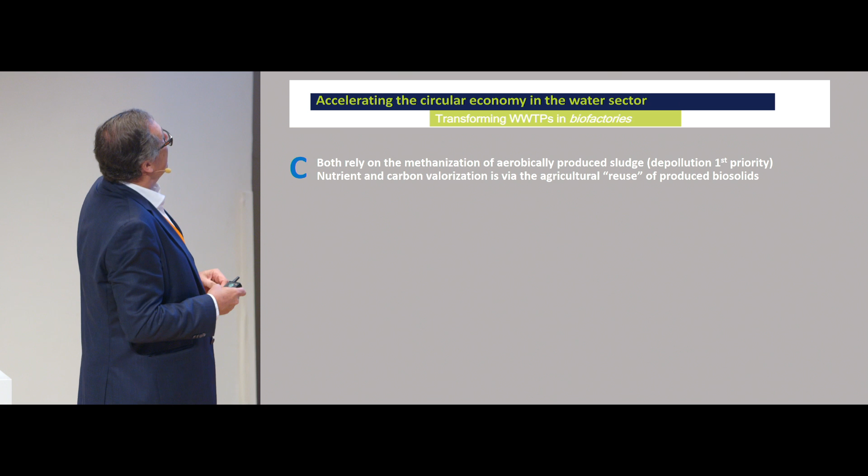But these two examples, as interesting and outstanding and state-of-the-art as they really are, we should be honest, and you probably all recognize the little scheme up there in the corner, they belong more to the reuse economy than really to the circular economy. The circular economy is something a little bit more. Regarding carbon, both of these plants rely on the fact that the biosolids generated will be put into the land as a fertilizer. And they also rely on producing this sludge first by an aerobic process, and so at the very end they are burning all the carbon to CO2.

So what if we would put some anaerobic treatment in front of the treatment train and first harvest all the potential energy which there is in wastewater, and then we would depollute the rest of the water stream? The scheme would change completely. We would have a completely different system. What if the priority would be to produce some valuable monomers or polymers, instead of producing two molecules, CO2 and methane, which are the most oxidized and most reduced forms of carbon? Doesn't really make too much sense. It did make sense 50 years ago when the priority was, and only was, depollution.

Regarding nitrogen, obviously both of these plants have some form of sophisticated nitrogen removal systems. But there is no system to recover this nitrogen in a more valuable form. What if we could produce valuable nitrogen-containing chemicals instead of blowing nitrogen gas into the atmosphere, which is what we do when we nitrify and denitrify? And regarding phosphorus, which is the other third important element, both of these have some sort of phosphorus reduction, but they have no struvite process or any alternative process for phosphate recovery.

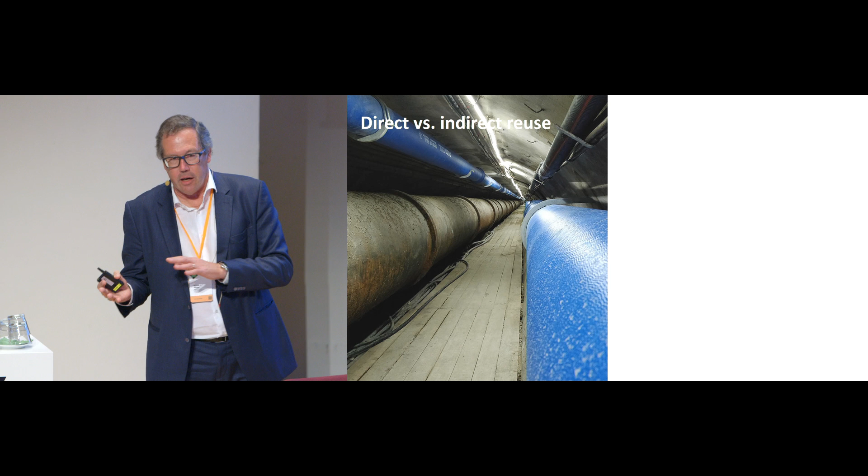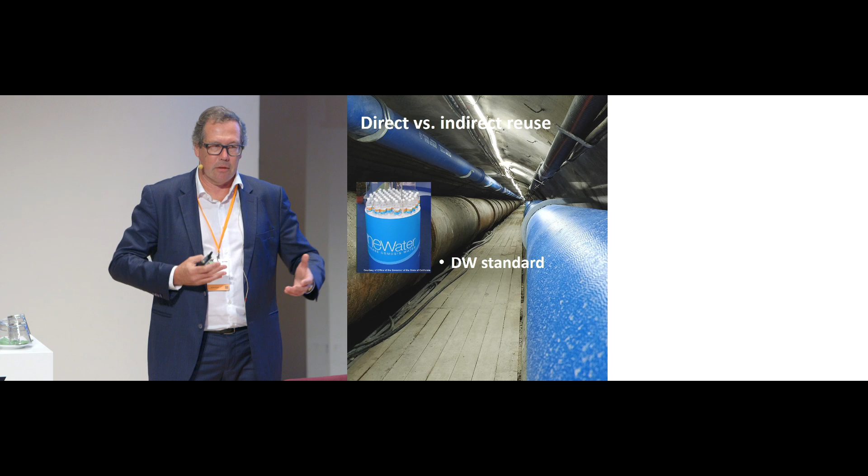I think we need to take some of these global aspects that we have been discussing before, and we need to apply them to the local management practices. For example, we need to make a choice between direct or indirect water reuse, or both. What does each imply? Direct reuse implies that we treat all wastewater to drinking water standards. And that, as you can imagine, is kind of expensive to do. There's only one water quality then. That can then, that's the advantage, go through any piping mains.

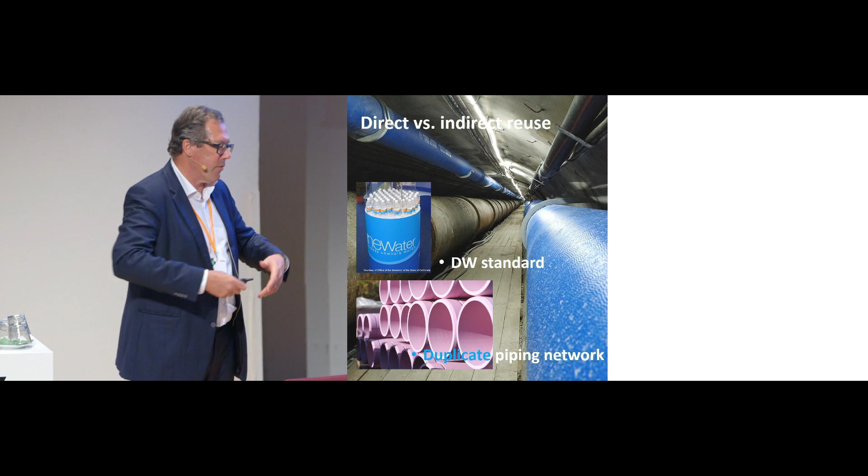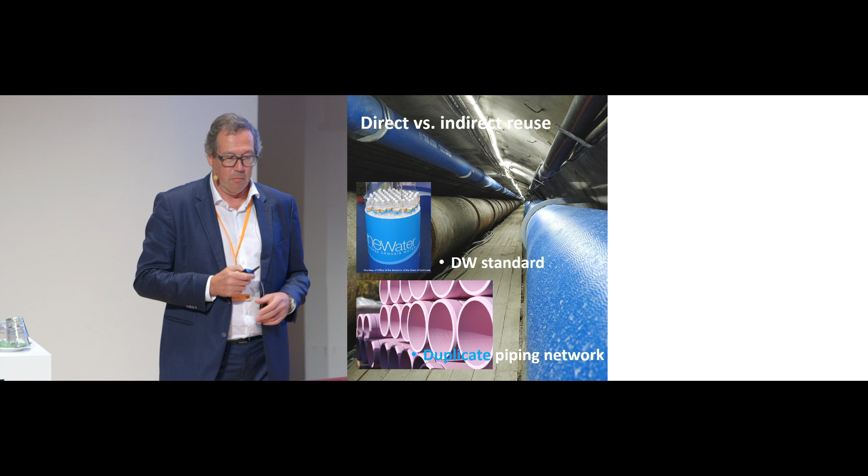The alternative is to treat wastewater to a less important level and have indirect reuse for agriculture, for cleaning, for irrigation, what have you, even for recharge. But then, because of security reasons, you cannot use the same water mains, and that means you have to develop a second piping system, like they do in California, which has to have a different color. That's why it is pink colored. Okay? And that is in itself a huge investment to do. So probably the answer is we need to consider both depending on where we are and what we're looking at.

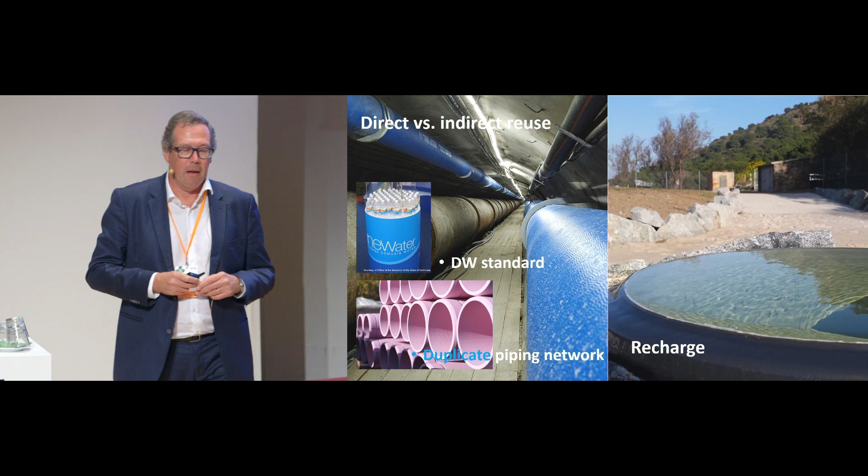The second element we had was recharge into the aquifer, recharge into the ground. Because we do recharge into rivers and lakes and even into the ocean. We do that. But into the ground very little is done, it's very little used. There's clearly a quality issue because down there we really don't control so many things. So if we put something really naughty down there that we don't want to be in the water, getting it out of there later on can be impossible to very, very difficult. Okay? So there's a quality issue of what type of quality we can pump down there.

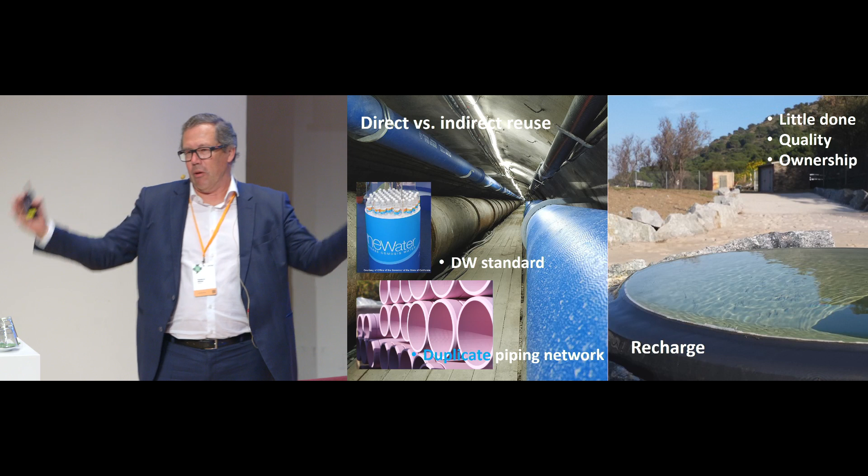There is a question also of ownership, because aquifers extend beyond political and regional borders, countries, etc., and are sometimes even not well understood. There is also a question of ownership between who pays for treating and pumping the water down, and who takes it out again. If it's all 100% public, you could say, well, it's no big issue. There is still the issue of long term, of taking a political decision today for water that might be taken out 20 years later. Some politicians would say, well, I have other priorities.

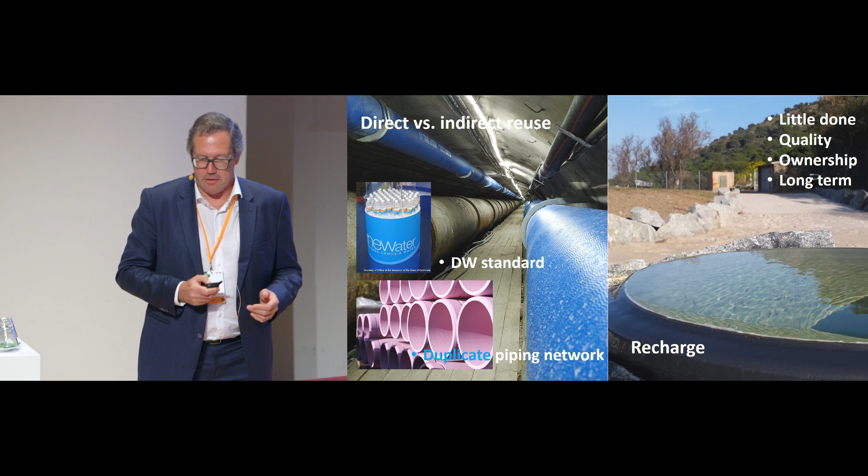Then there is the surface storage that we can contemplate. Surface storage is in the form of dams, obviously much more extensively used. Here the question is, what is the real priority when we build a dam? Is it our water policy? Is it harvesting electricity through hydropower? Are we really making sure that those priorities are right and straight? How many dams need to be built? How many basins do we construct? And how big do they have to be? The Three Gorges for everybody? I come from Spain which, at the time of the Franco regime, which was not very democratic, made a lot of water dams, and today we're very happy to have those. So this is obviously quite controversial.

Another thing which is very controversial is the water transfer and the potential water markets. Here, obviously, the issue of water pricing becomes the central element, and that is a controversial and highly political issue. And I'm not talking about public or private water management. It's the cost that we pay for water.

And it's certainly a new paradigm, because if we still have today in Europe, not everywhere, but we have a problem with the full recovery of water treatment costs, the new paradigm is actually saying we should pay water for its cost of opportunity. Where I come from in Spain, in Murcia, the farmers say the most expensive water is the water you don't have.

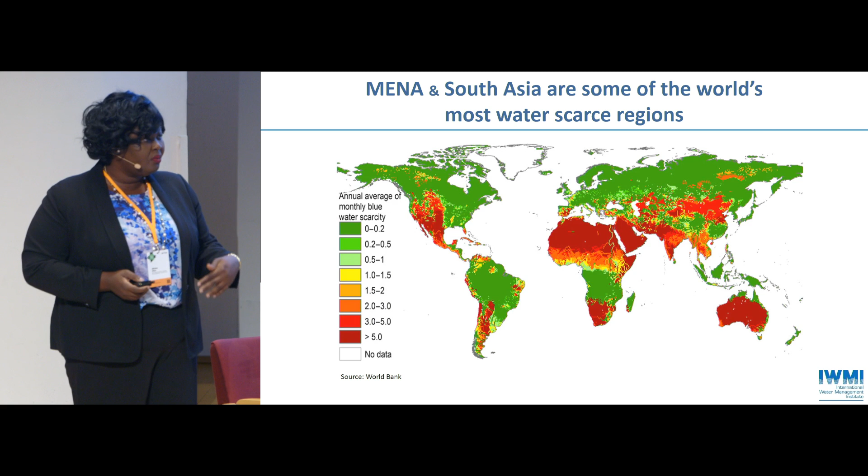So this graphic is from the World Bank, which highlights some of the hotspots for water scarcity. And as you note from the graphic, the MENA region, as well as Southern Africa and South Asia, are some of the regions that are currently facing significant water scarcity, but also a decade from now, 2 decades from now, the situation is expected to worsen.

If we take the example of South Africa, we all heard in the news how they experienced a day zero, where Cape Town, the city was running out of water. And this was a significant wake-up call for those people living in Cape Town. But in many cities in Africa and in Asia, they face their own day zero quite frequently.

Every dry season, the cities run out of water, but also when their energy supply is rationed, and so the pumping stations do not work, and there is no water that flows through the taps. And so with these examples and that of Cape Town, it has really made us rethink water security and how we can no longer take it for granted.

And we all know how circularity is key, or really the tenet of integrated urban water management. And as a previous speaker alluded to, there are many innovative models. If we look on the left, intersectoral water trade, where we're looking at the potential for reallocating freshwater, for example, used in agriculture, to higher value use in urban areas, but also treating wastewater for use for agricultural production. We can also consider simple models where the cities as their own downstream users, again, looking at how we can recharge our aquifers with treated wastewater.

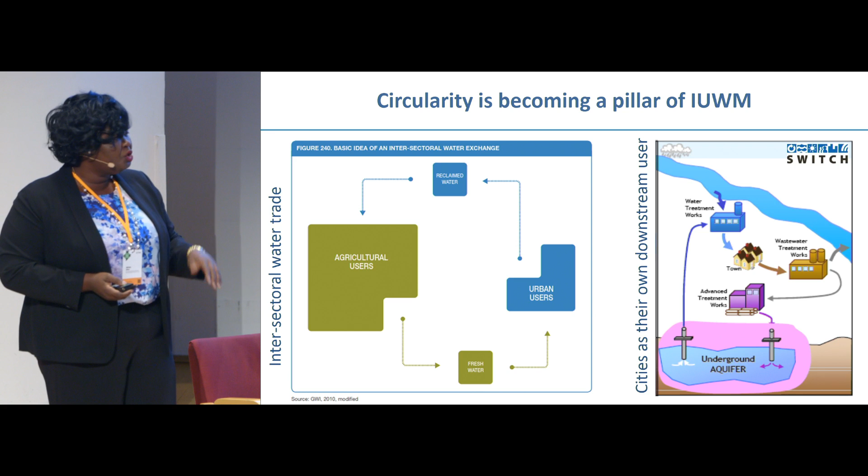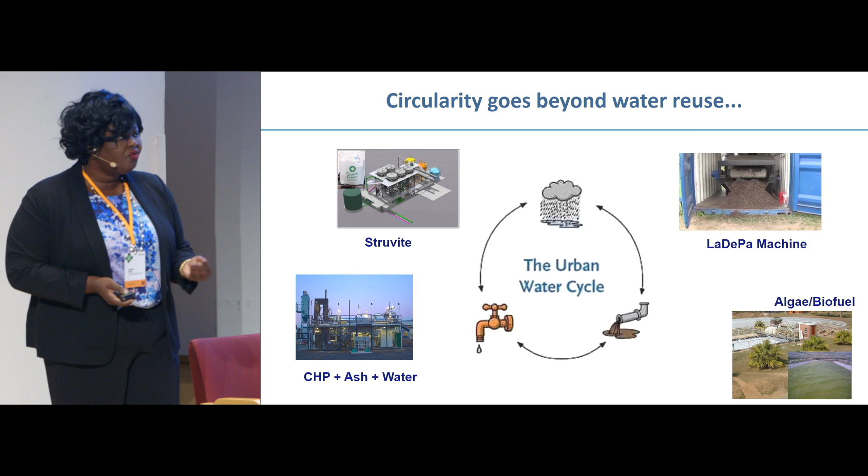Beyond this, we know that we're not only treating wastewater, but there is, of course, significant potential to recover nutrients and energy. The technologies exist. From developed country contexts, these have reached scale, as was highlighted by the previous speaker. However, a lot of these technologies are not applicable in developing countries, and when they are, unfortunately, they remain at the pilot level, and we're not able to effect the change that we're all looking for.

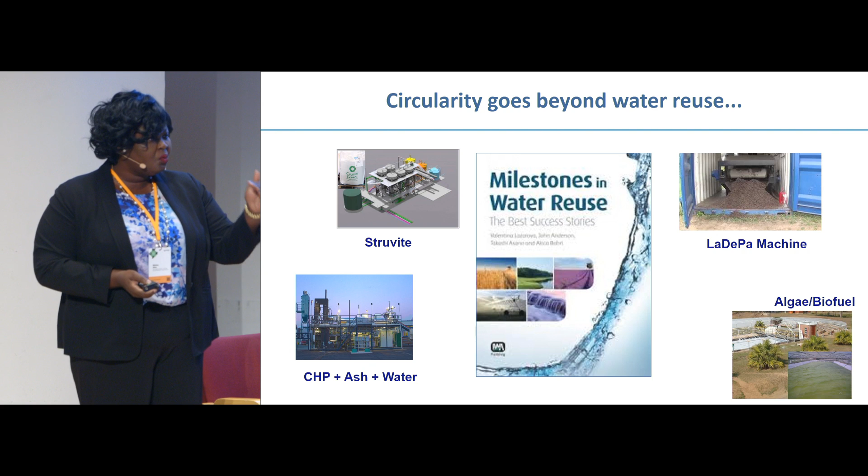And so in the case of Ghana, we really wanted to understand if we are going to integrate these circular economy concepts and principles into the way that we're managing water in our urban areas. It was important for us to move further up the value chain and actually look at the infrastructure that we currently have and really see the level of operation and whether it was actually covering and serving the population.

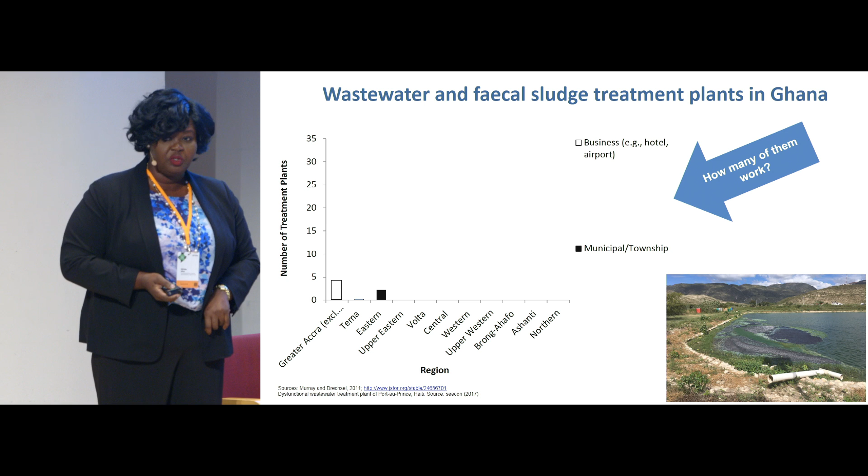So across all the region, based on the population, we noted that we did have sufficient number of treatment plants to manage the waste that was being generated. However, looking closely and trying to assess how many of them actually functioned before we took the steps towards circular economy, for the entire country, we have less than 10 wastewater treatment plants. And so this is what we have. The majority of the treatment plants are not functioning to capacity, or oftentimes they don't at all. And the majority of the waste that we're generating still goes into the environment untreated.

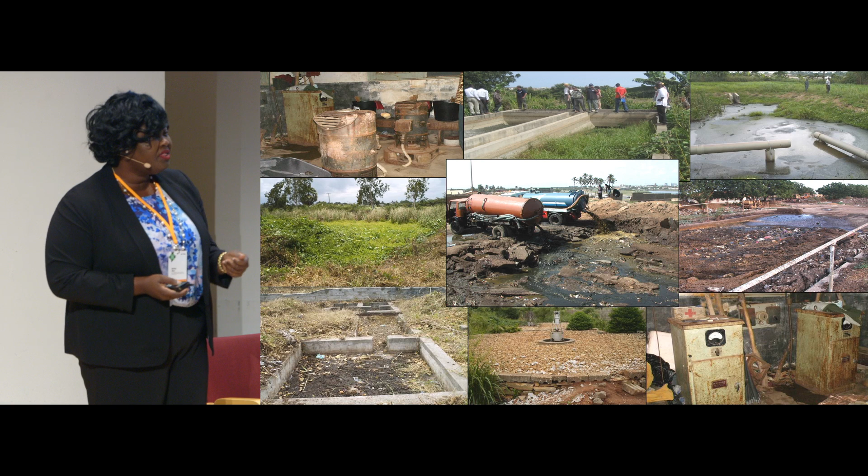And this is critical because it's great that we're talking about integrating circular economy guidelines into the way that we are drafting our next frameworks. But it's important that we understand that we are not going to function in silos. And so understanding the benefits it generates to the sanitation sector, but also the interlinkages and the implications that it will have when we're thinking about investing in some of these interventions.

And so what we have is that we're still struggling to treat our wastewater because we don't have infrastructure or the capacity to ensure that these investments are sustainable. And we're still creating significant water pollution. When we talk about wastewater, we often only think about wastewater that flows through sewer systems. But in many developing countries, the majority of the population depends on on-site sanitation systems, septic tanks. If we take the case of India, 100 million septic tanks do not have receiving treatment plants. And so again, we go back to the challenge of

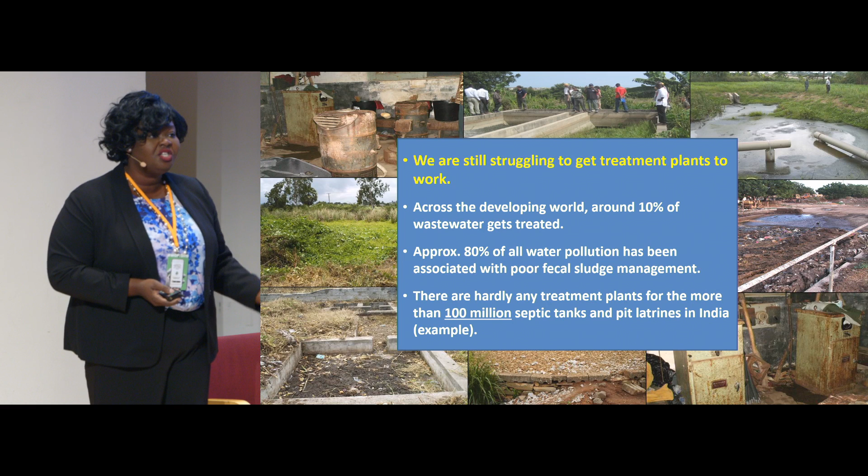environmental degradation. We do have circular economy-based interventions, and donors have invested, and we're seeing business growth in some parts of Africa as well as Asia. However, these continue to be characterized by subsidies. We don't see them being scaled up to have the impact that we're all working towards. We know that financing is a key challenge, but what remains in developing countries is business growth, really understanding business planning and our management strategies.

Otherwise, we're going to remain at a pilot level and we won't be able to scale these up to effect change. And this is where we've talked about business, but really tangible business models that work. And of course, these are not functioning in a vacuum, but really housed in the right enabling environment. And so my next couple of slides are going to highlight some models that have been shown to actually be successful and have promise to be scaled up in developing countries to actually have impact.

And we already know this is a very common example where we're treating wastewater and it's being used in the agricultural sector. You can have a different constellation, whether it's a public-private partnership, or a public entity or private entity that manages the treatment of the water. And this is sold to farmers, and there are benefits to households and so forth.

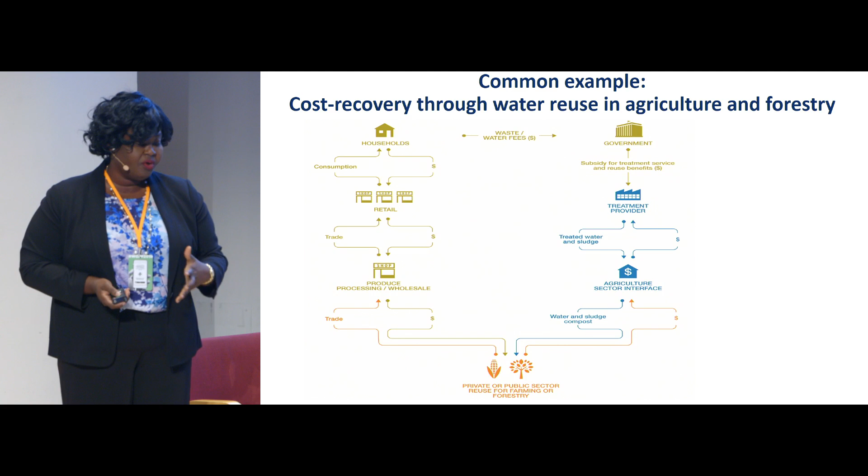The main element of this model is we're not only generating benefits to the agricultural sector, but we really want to reduce the cost for operation and maintenance, the burden that is borne by municipalities. Because in many developing countries, they simply do not have the budgetary allocation to cover the cost. And so with a model like this, we've known it to be very successful in the MENA region, where we're generating revenues to cover the operation and maintenance costs, but we're seeing significant benefits to farmers as well. And this has to happen with very clear institutional responsibilities and regulatory support.

But as we have noted, if there are alternative water sources, then the issue comes to what is the market demand. And again, going back to pricing, if fresh water is priced lower than treated wastewater, then we know that there is no willingness to pay and there won't be a market. And so this example really shows the potential that circular economy has for the sanitation sector, but also the benefits that it generates beyond that.

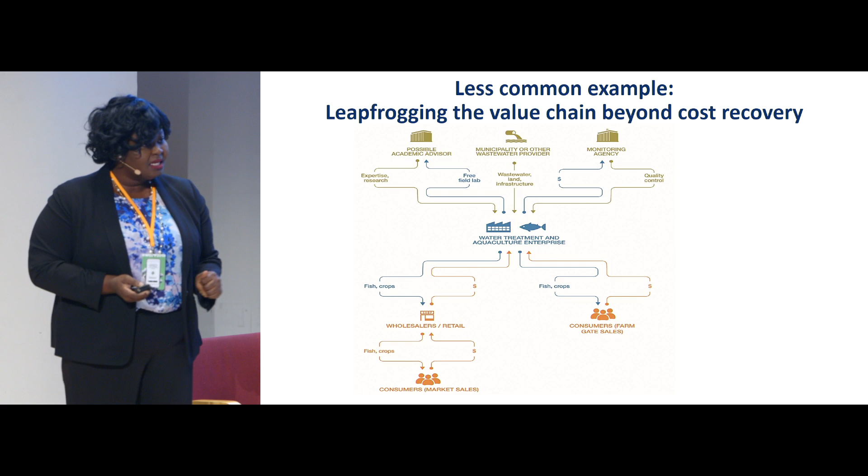Looking beyond just agriculture or irrigation, but looking at how we can leapfrog the value chain in treating wastewater for aquaculture production. And here we've seen cases in Africa and Asia where they're not only recovering their costs, they're breaking even, and some of them are actually generating revenue. And so from that perspective, similarly, ensuring that there are very clear benefit-sharing mechanisms between the entity that manages and operates the plants and the people that own the assets.

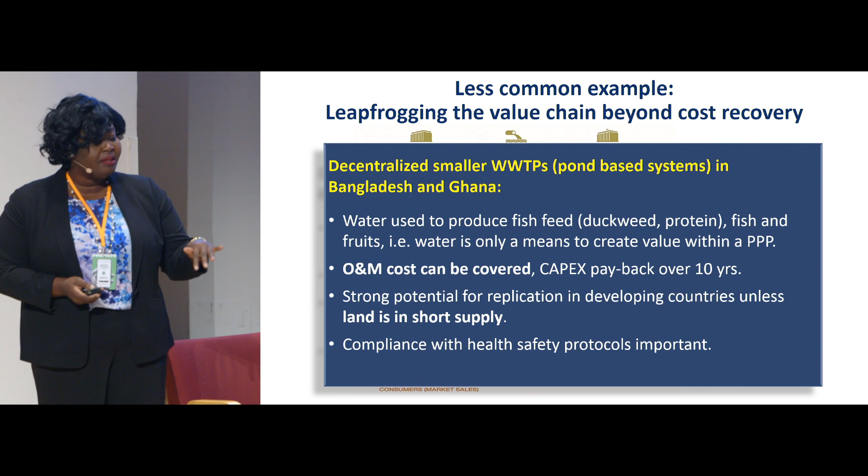With treating wastewater for aquaculture, for example, there is potential for full cost recovery, but there are resource constraints that we have to keep in mind. And this relates to, again, when we are transplanting technical solutions or business models into the developing country context. Related to land, for example, where we really have to think about what technologies work. And with aquaculture, we have to not only look at occupational health risks, but also the consumer perspective, and ensure that we're implementing health safety protocols.

This is a model that is emerging, intersectoral water trade, again, where we're looking at how we can reallocate water for different uses and ensuring that we're matching the uses to the water quality. And this has been successful where there is a year-round deficit of water and where farmers are able to swap out fresh water for a larger quantity of treated wastewater.

The challenge with these business models, while they are very promising and can be successful, is the contracting mechanisms. Oftentimes, water rights are not clear, and so the contracting agreement oftentimes results in one party reneging on the terms of the contract. But there's great potential, as we've seen in areas where there is significant water scarcity.

So there are some examples, commercial entities in Ghana, in Eastern Africa, and also new cases in South Asia where we're converting fecal sludge to an organic fertilizer. And one of the first commercial plants in West Africa was established through a collaboration with IWMI and the municipalities. Here, essentially, we're not only looking at how we can treat waste and harness the nutrients from the waste and provide benefits to the agricultural sector.

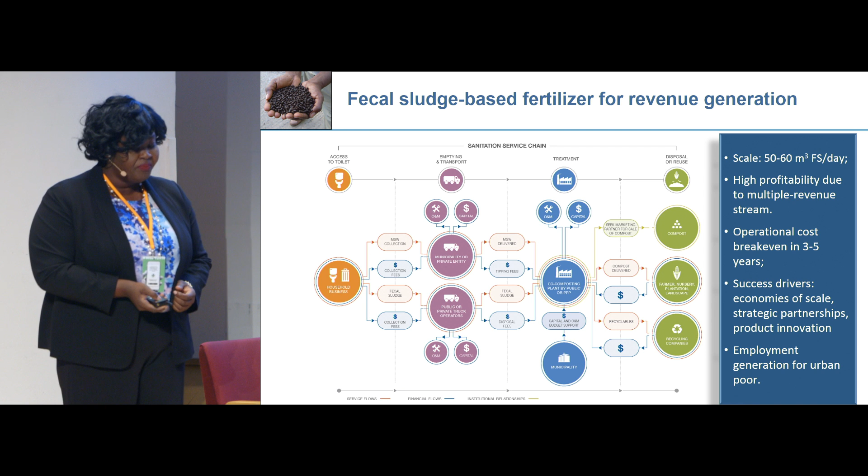These models vary in scale. Some of them can be small or large scale, and of course, generating significant benefits to the informal sector, again, if we find ways to integrate them into the sector.

So in concluding, circular economy principles are great and we have great conversations, but it's really about how do we make these amazing technologies that have been developed actually work in the developing country context. And while there has been some traction, we still need to work on our enabling environment, looking at the benefits that it produces, but also viewing it from a business lens, and looking at what really works and thinking beyond just cost recovery. And again, when we talk about water, think beyond irrigation, but also looking at different value propositions that can generate more economic benefits.

And giving significant consideration to business models around water trading and understanding what the water right mechanisms and what enabling environment is required. So the cases that I spoke about are in a recent publication, and it is open access and available online. I'm happy to answer any questions thereafter.

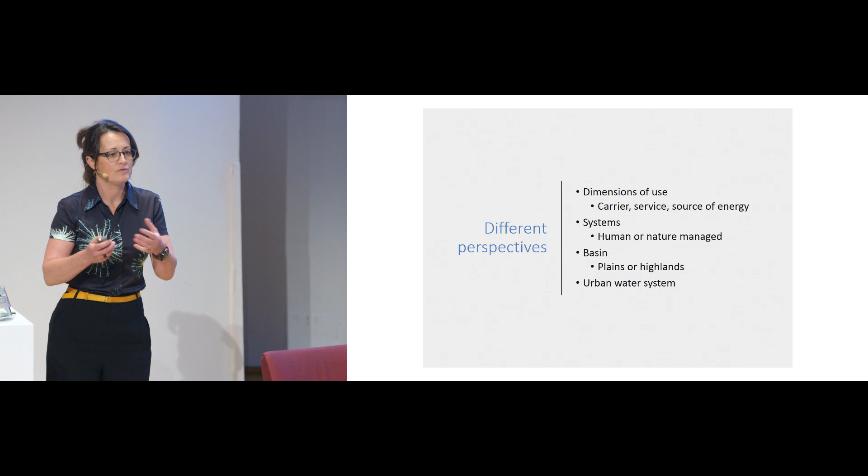And we have different perspectives, and I won't really dwell on this, but water has already been discussed. It's a carrier of nutrients, of chemicals, of minerals. We commonly think of it as a service. It's something we consume. It's used in production processes. But where you are depends, and the strategies you have depend on whether your city is in an arid plain or if you're at the top of a wet highland. Are you talking about a human-managed system, a nature-managed system? So we have this current linear model.

So an example, first of all, anaerobic digestion: we use it to process sewage sludge, and we also use it to process food waste. Because of different directives and the policy environment we're in in the UK, it's very difficult to co-digest food waste in an anaerobic digester that works on sewage sludge, partly because of the different setups. A municipality might run the AD for the food waste and a private company might run the AD for the sewage sludge, but also because of the different directives of spreading and how we've transposed those directives. So two different sets of legislation, so people don't do it.

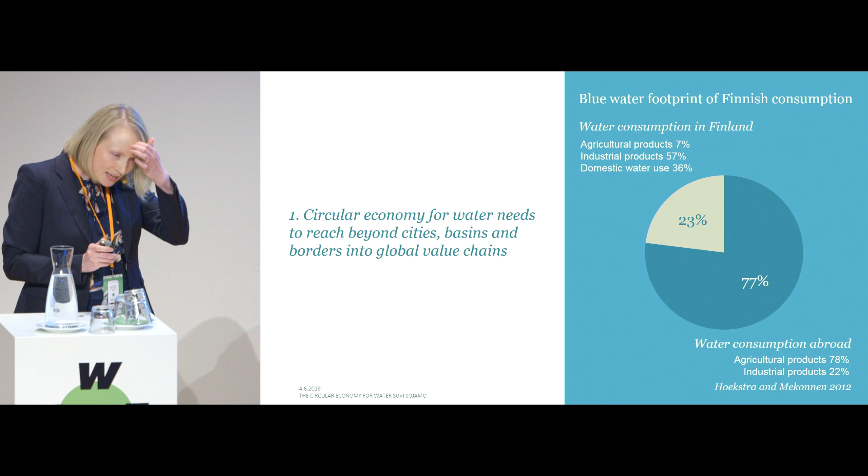All right, first lesson. It basically underlines that internal measures are rarely enough for tackling water challenges, regardless whether we are discussing cities, countries, basins, or companies. Regardless whether we are discussing corporate water stewardship or circular economy, we really need to look into global value chains that were also discussed earlier today, as they are really important structures for water use management and governance. So it's not only the traditional water use infrastructure we need to be paying attention to, it's also the broader structures where water is used, managed and governed.

And Finland provides an illustrative example in this regard. If we look at the blue water footprint of our consumption, that is the total amount of surface and groundwater consumed by us annually, actually 77% of that footprint lies abroad, despite our water abundance. And that footprint is also left in areas that are water scarce and suffering from other water-related problems. That said, we need to understand the whole life cycles and global interdependencies of our consumption and production, also when it comes to water.

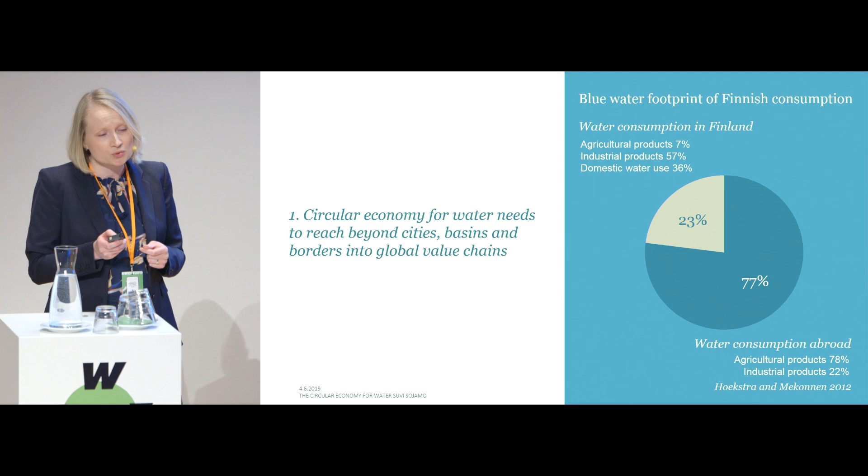The second lesson relates to the drivers for business engagement in water. There's a lot of talk about the need to engage businesses more in solving water challenges, contributing towards SDGs. At the moment, it's not happening at the pace needed, as this rather blunt quote from CDP Water, which collects water disclosure data for investors, puts it: currently, corporate action is insufficient to achieve SDG 6 and deliver a water secure future.

At the same time, companies of different sorts and sizes are the major water users internationally, and that results in responsibility. That's a very strong reason for a business case for increased engagement and understanding of water. In addition, water risks and opportunities are other important drivers. They are usually classified as physical risks and opportunities related to water availability, water quantity, water quality. They might be related to reputation, as the way water is approached and dealt with affects company reputation and markets.

They might be regulatory, as too weak, non-functioning regulation hampers the operating environment for companies and stakeholders alike, whereas fit-for-purpose regulation, which has also been the flavor of today, really levels the playing field and ensures sustainable practices by all. Ultimately, all these risks and opportunities materialize as financial risks and opportunities, which are related to both investments and profit.

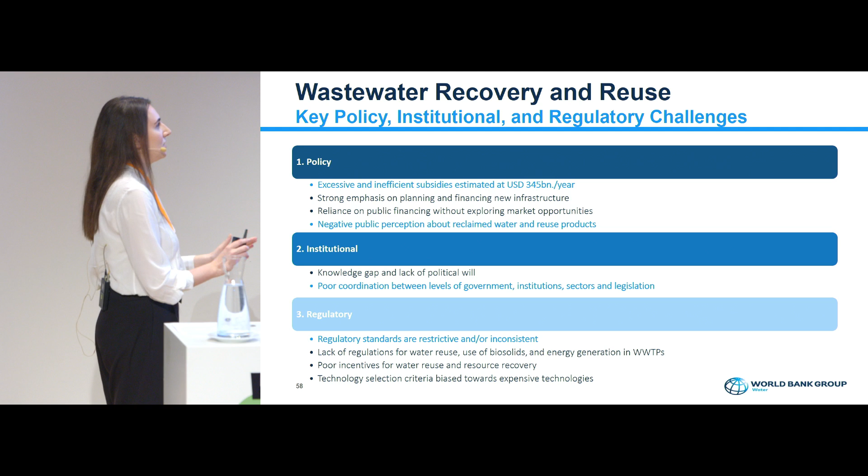And they can also be inconsistent. So, like we've said before, with wastewater reuse, you need to be able to work across energy, health and environment and so on. And without having a complete regulatory framework, not much can be done.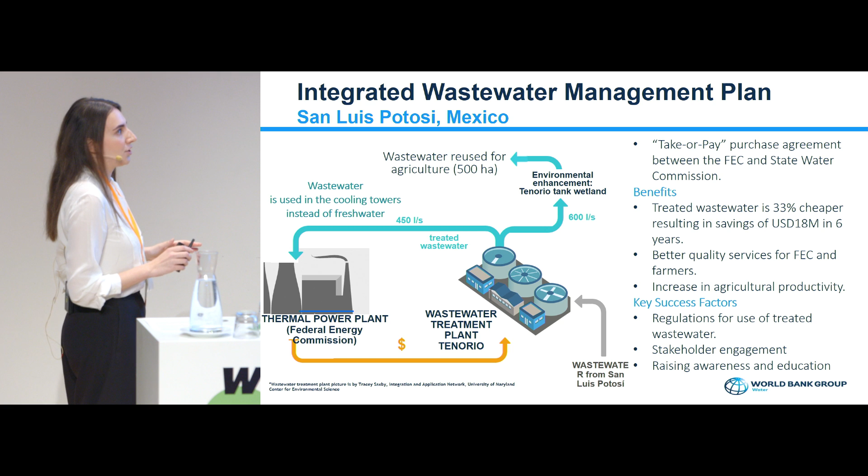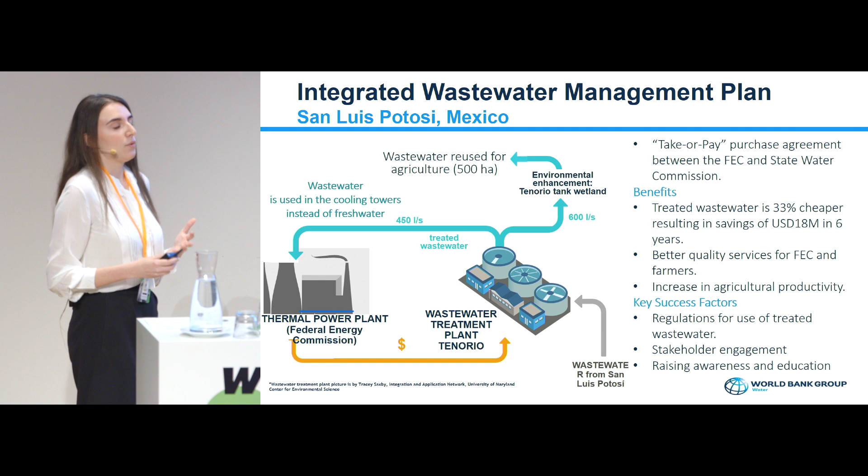You'll see at the bottom there some of the key success factors that really stood out with this arrangement: regulations were implemented and introduced for wastewater reuse. Stakeholder engagement was key. They made sure that the agricultural sector was involved, the energy sector was involved through negotiating the contract, and raising awareness and education to make sure that they address that demand side.

This is a case in Durban in South Africa. It was a 20-year concession contract. And this contract was interesting because the technologies that were implemented were actually tailored to the two key industries, but at the same time it was made sure that they can be reused after the 20-year contract is done. Again, they're paying up to 50% less for their water resources. They also have risk mitigation measures within their contract. The recycling plant is getting its regular source of revenue.

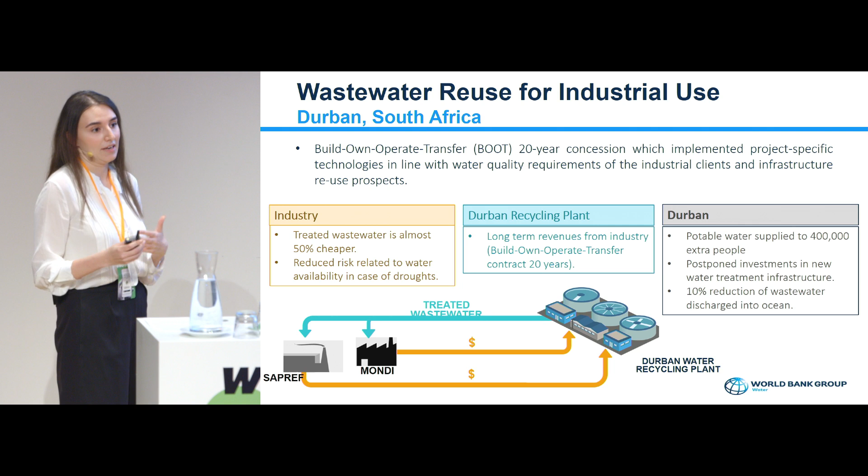And also, in terms of the community themselves, fresh water resources were freed up for 400,000 people. There's 10% less wastewater discharged into the ocean. And also investments in new infrastructure weren't really necessary during that specific time period anymore, and they were postponed.

And lastly, Egypt. That's where I'm originally from. And this was the first PPP project to be implemented in Egypt. And so in order to make sure that the governance mechanisms work well, they established a PPP unit within the Ministry of Finance.

They made sure that it had people of the highest caliber. They made sure they had external advisors to make sure that they were gaining lessons learned from best practices. There was a lot of stakeholder engagement and institutional coordination, and that was through the governance committees and oversight that provided oversight and guidance just to make sure that everything was being done on time, to make sure inputs that were needed were received, and so on. And also risks. Obviously, again, risk analysis and allocation was clear, and understanding of roles and responsibility were made clear.

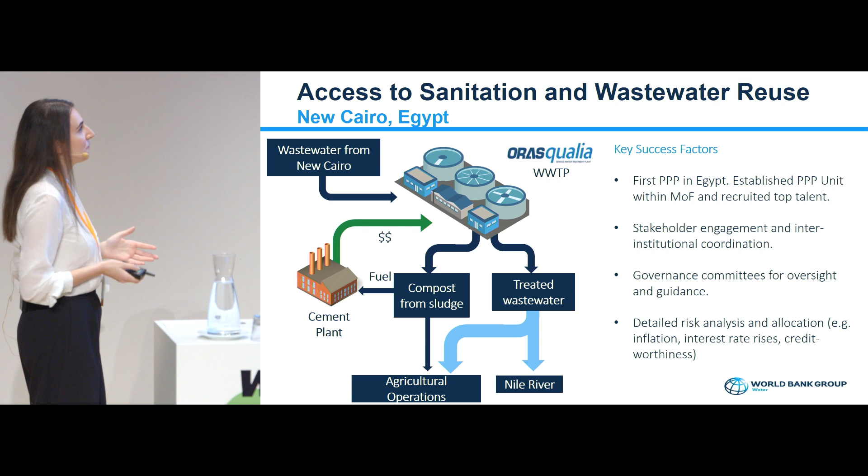One is costs. Yes, water pricing is a key, it's a political issue, often it is. However, it's really, really important to ensure that the market prices reflect externalities of both production and consumption. Relatedly, on that point, by doing that, the freed up government funds that were previously spent on subsidies can be used to leverage private sector financing and private capital. And it also gives private investors a real signal that we're taking this seriously. It gives them an incentive to start thinking about innovative ways to address this challenge.

Because as of today, with the nature of water sector projects and with the nature of water infrastructure, it takes a long time, first of all, to start seeing gains from your research and development investments. It takes maybe up to 20 years to start really seeing revenues coming in. So there really needs to also be a boost in incentives for the private sector to engage. Collaboration is another key issue. I've spoken about that, so I won't go into much detail.